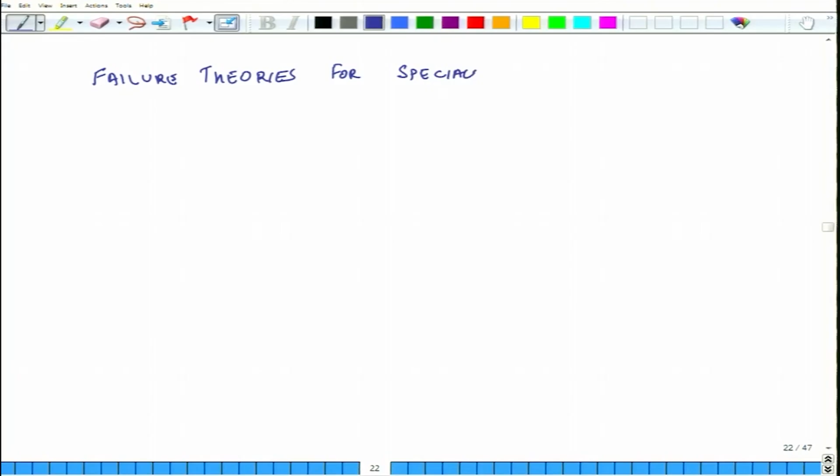So, our theme of discussion is failure theories. Failure theories for specially orthotropic lamina, and since it is very thin, we assume that it is plane stress. That is assumed. Okay.

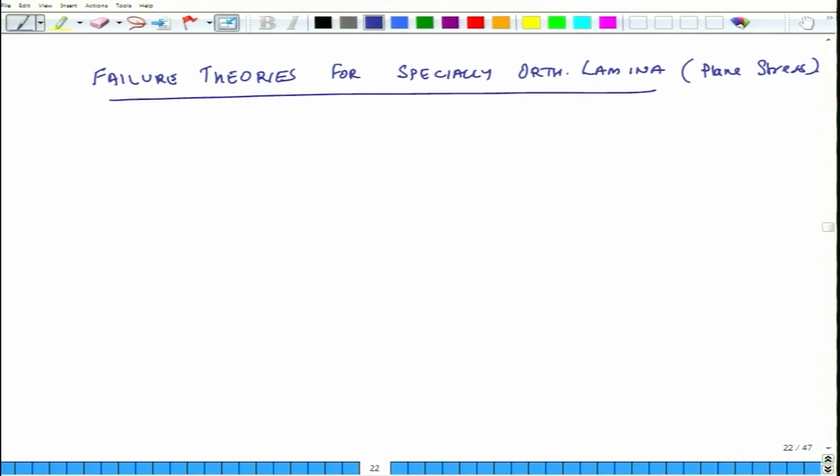So, before we start discussing in detail, we know based on our earlier studies that if we have to predict failure in case of metals which are isotropic materials, then we have several theories of failure. For instance, maximum stress theory, another one is maximum strain theory, another one is maximum strain energy theory, then there is another one known as von Mises theory.

And in several of these theories we use the concept of principal stress. So, what we do is we compute the value of principal stress and we compare that value with the strength of the material, and if the strength of the material is more, then we say the material is not failing. If the strength is less compared to principal stress or principal strain, then we say that the thing is failing.

So, this is what is done in context of isotropic materials, and the reason we are able to do this is because the strength of the material is same in all directions. If you have a piece of metal and you pull it in x direction or y direction or z direction, its strength does not change with respect to the orientation of the force, because it is an isotropic material.

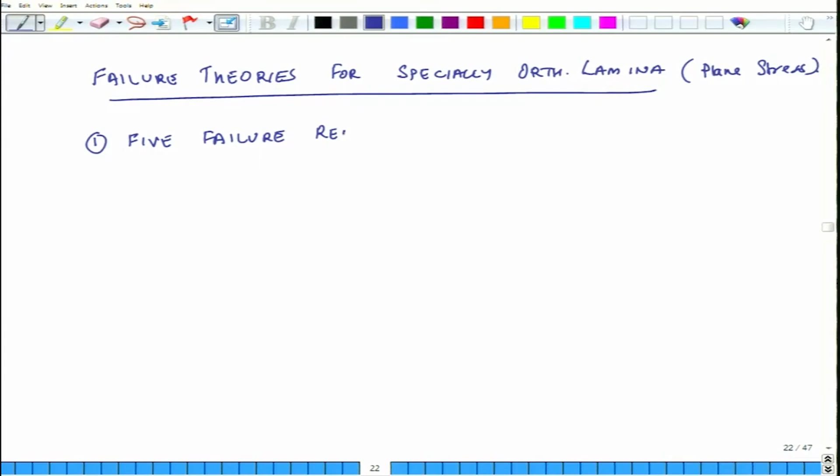So, in that context, first thing we will say is that a specially orthotropic lamina under plane stress has 5 important failure related material properties. So these are 5 fundamental material related properties.

What are these? The first one is sigma Lu, and this is the ultimate tensile strength. So U is ultimate; sigma Lu is tensile strength in L direction. This is the first fundamental.

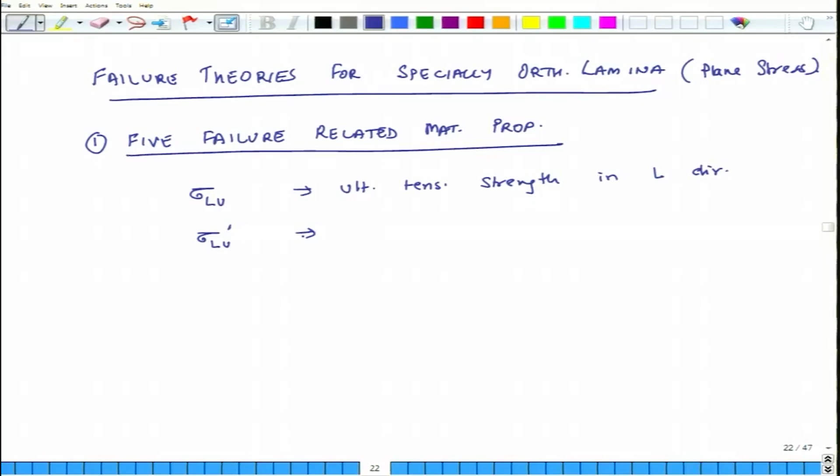The second one is sigma Lu prime. If I have a lamina and, instead of pulling it in tension, I compress it, it may fail also at some load. So this is ultimate compressive strength in L direction. Okay. So these are 2 properties.

Similarly, we have 2 properties for transverse direction. Sigma Tu is ultimate tensile strength in T direction, transverse direction. So what is sigma Tu? Fibers are like this and I am pulling it in tensile direction, but in the transverse direction.

And sigma Tu prime, here the prime indicates the direction is compressive, it is ultimate compressive strength in T direction.

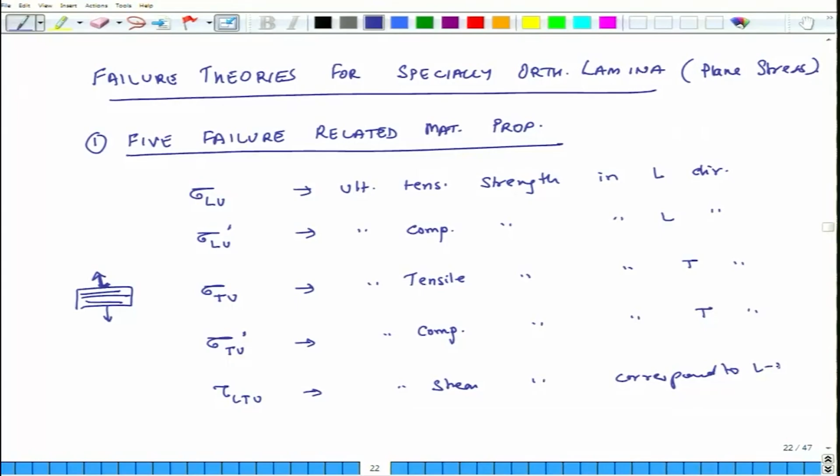And the last one is tau LTu, it is ultimate shear strength corresponding to LT plane. So what that means is the lamina is loaded only under shear and it may fail, and the fibers are like this.

Okay. So these are 5 material related properties associated with failure of a thin lamina, specially orthotropic lamina, which is subjected to a plane stress situation. Now, using these 5 properties, 3 theories will be discussed, which will help us understand when a composite is going to fail. The first one is maximum stress theory.

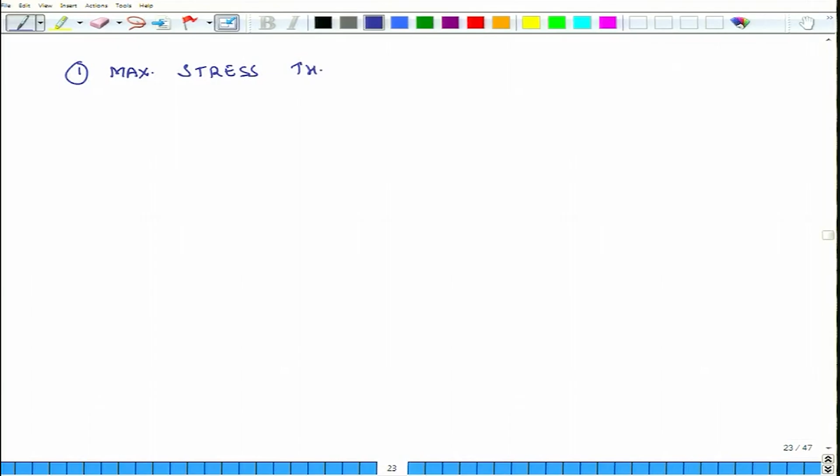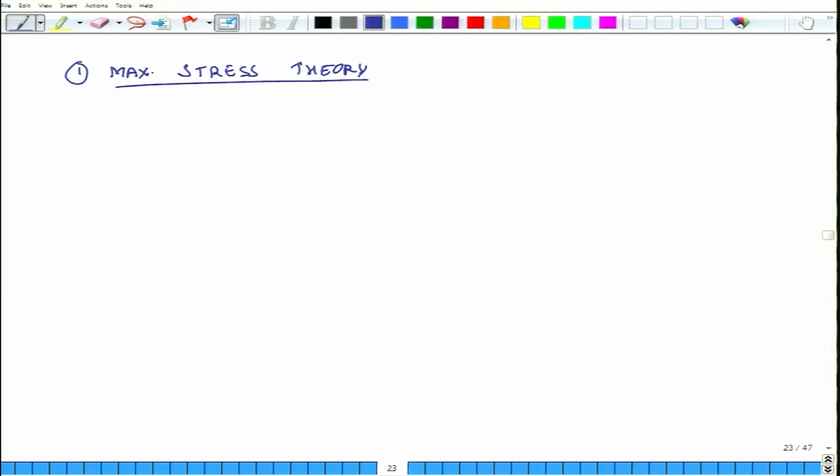Maximum stress theory. So what does this theory say? That a single lamina is not going to fail as long as the stresses in the L and T direction, sigma L, sigma T, and tau LT, are less than their respective strengths. If any one of those stresses exceeds its strength, then the material is going to fail.

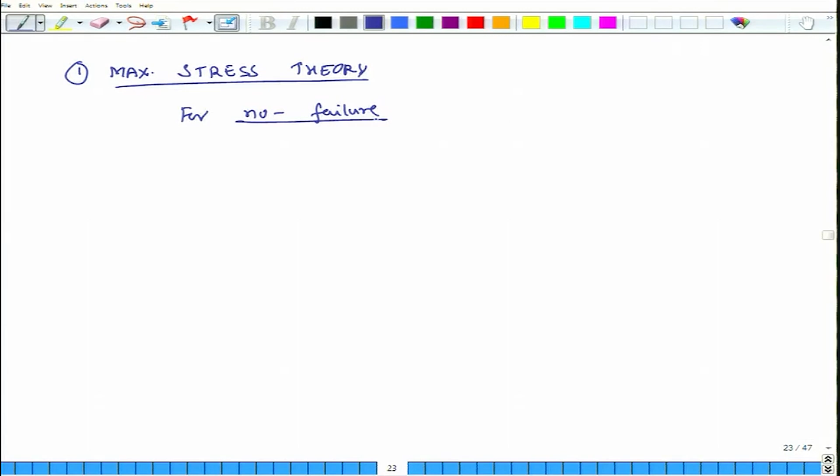So mathematically, what does that mean? That for no failure, the following conditions have to hold true. Sigma L should be less than sigma Lu, sigma T should be less than sigma Tu, and tau LT should be less than tau LTu. Okay. All of them have to hold simultaneously.

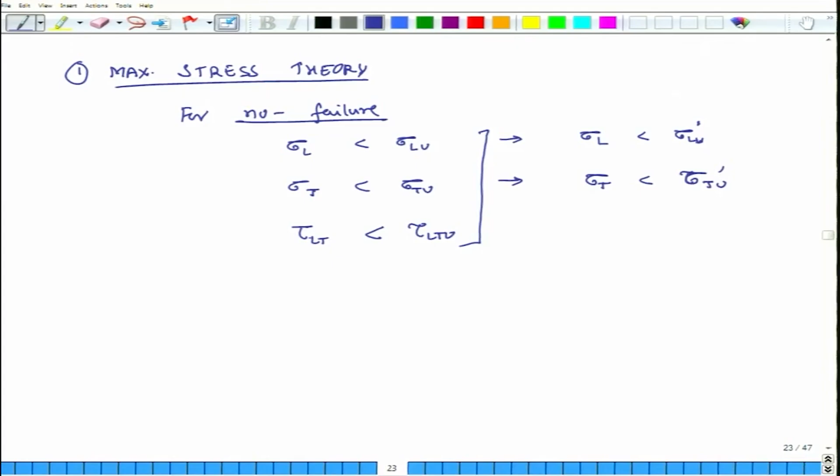Now, there could be a case that sigma L is negative. Then in that case, the condition would be sigma L should be less than sigma Lu prime. And if sigma T is negative, then sigma T should be less than sigma Tu prime. So it depends. If sigma is compressive, then you have to compare it with its compressive strength in the appropriate direction.

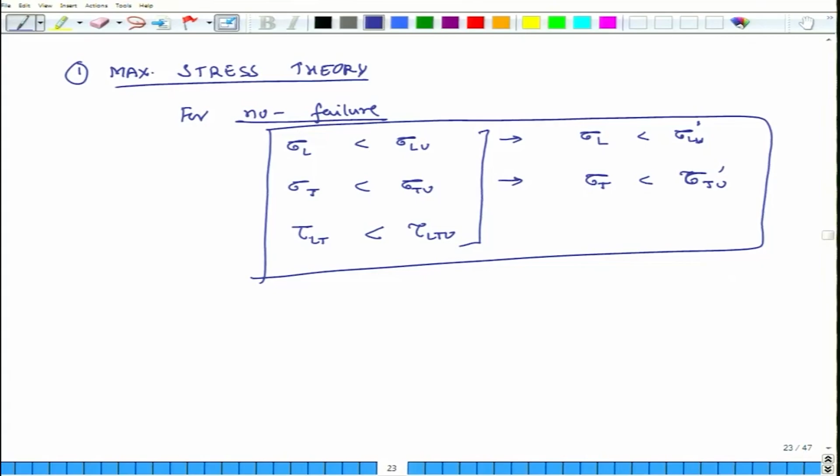Okay. So these 5 conditions are there, and all these 5 conditions must be true; even if one of the conditions gets violated, the material is going to fail. So, this is the first theory for failure of composite materials. Okay. So, let us do an example.

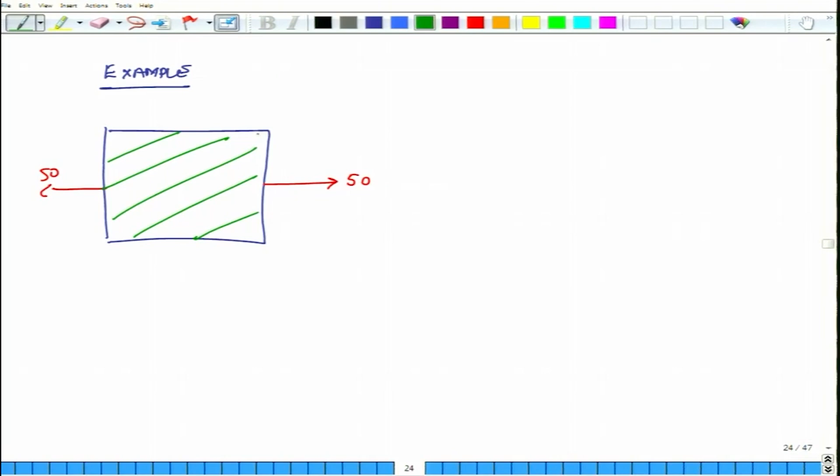So, the example is, we have a lamina and I am applying some stresses on it. So, what are the stresses? 50 MPa in tension. These are my direction of fibers. So, this is my L direction, this is my T direction, this is my X, this is my Y. So, in the Y direction, the stress is negative.

So, it is minus 25, and then I have also a shear stress applied, and the value of shear stress is 50. So, all these are MPa. So, tensile stress in x direction 50 MPa, compressive stress in y direction 25 MPa, shear stress 50 MPa, and the material properties are also given.

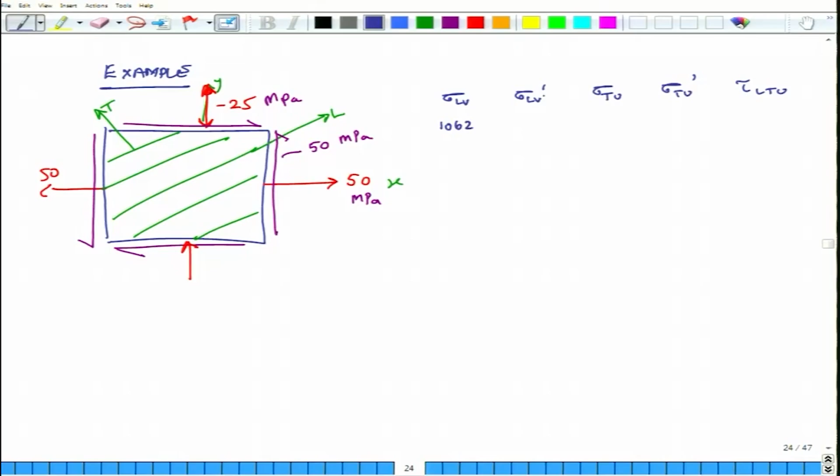So, let us see what the material properties are. Sigma Lu, sigma Lu prime, sigma Tu, sigma Tu prime, and tau LTu. So, this is all given. So, what are their values? This is 1062, this is 31, this is 72, this is 610, and this is 118. Okay. So, these are all in MPa. So, the question is, will the material fail? That is the question.

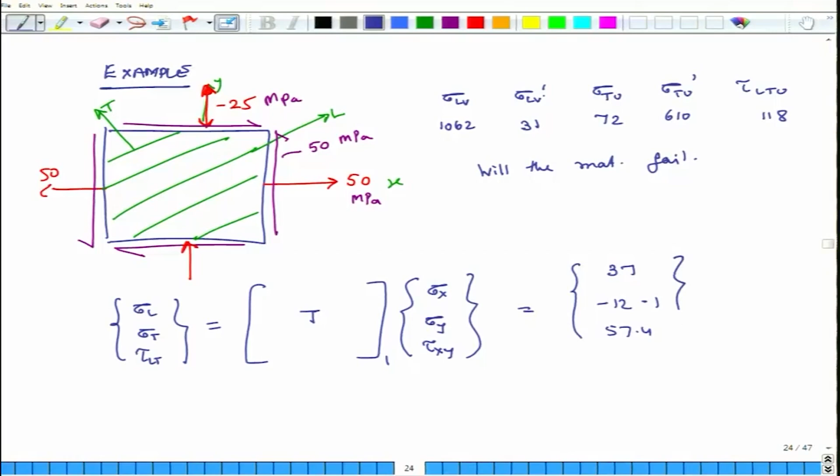So, what do we do? First, we compute sigma L, sigma T, and tau LT. This is nothing but the transformation matrix T1 times sigma x, sigma y, tau xy, and we know how to calculate this transformation matrix. So, we do all these calculations and we find that these values are 37, minus 12, and 57.4. So, sigma L is equal to 37, sigma T is minus 12.1, and the shear stress tau LT is 57.

So, now we compare whether any of these values is exceeding its limit. So, first we see 37 and we compare it with 1062. So, it is not exceeding. So, this is okay. The second number is 12.1, but it is negative. So, we compare minus 12.1 with 610, and again it is not failing.

The third one is 57.4, and we compare it with the shear strength of the material, and again it is not exceeding. So, all the conditions are met. So, no failure. Okay. There will not be any failure. So, this is how the maximum stress theory works.

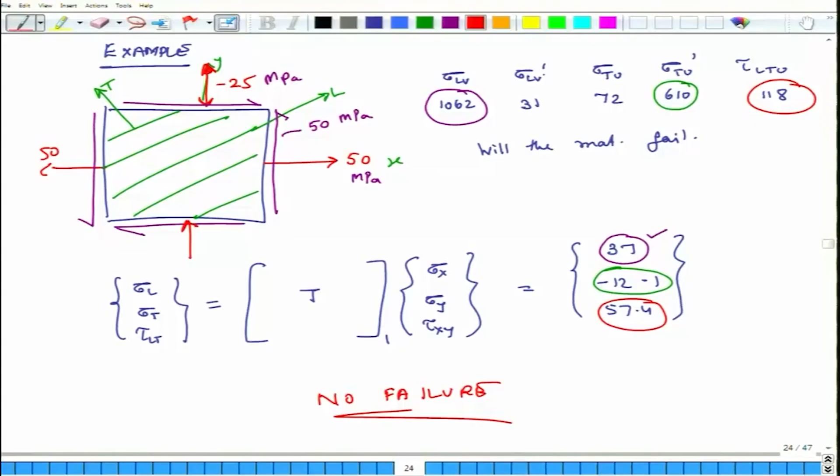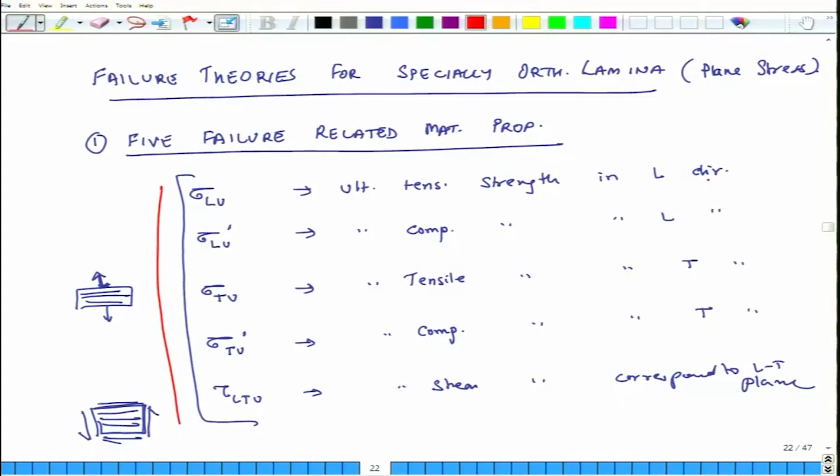Okay. The next theory we are going to look at is maximum strain theory. So, in stress theory we had 5 fundamental properties which are important, and we were saying that the material will fail at a certain stress state. In strain theories, we replace these 5 material properties by similar material properties, but strain related. So, ultimate tensile strain in the L direction will be epsilon Lu, ultimate compressive strain in L direction will be epsilon Lu prime, and so on and so forth.

The maximum strain theory says that the failure will not happen if all of the following hold true.

What are the following conditions? Epsilon L should be less than epsilon Lu, epsilon T should be less than epsilon Tu, and gamma LT should be less than gamma LTu. And suppose instead of tensile strain, I have a compressive strain, then we look at epsilon L should be less than epsilon Lu prime, and epsilon T should be less than epsilon Tu prime. So, these are the 5 conditions. So, as long as these conditions are valid, the material does not fail. If any one of them gets violated, it fails right away.

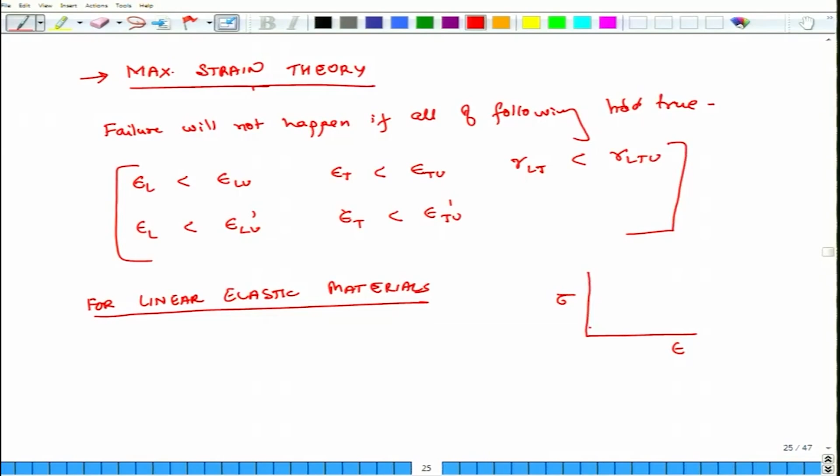Now, we will connect this theory with the maximum stress theory for linear elastic materials. For linear elastic material, what does that mean? It means that if I keep on pulling the material, if I double the stress, the strain also doubles. So, in that case, if I have a stress strain response, here strain and here stress, it is a straight line. It is not a line something like this. This is not the response.

If it is this kind of a line, then I can say that epsilon Lu is equal to sigma Lu by EL, only if the line is straight. If it is not straight, then I cannot have this. Similarly, epsilon Tu is equal to sigma Tu divided by ET, gamma LTu is equal to tau LTu divided by GLT, epsilon Lu prime is equal to sigma Lu prime divided by EL, and epsilon Tu prime is equal to sigma Tu prime divided by ET.

So, for linear elastic materials, the predictions from maximum stress theory and maximum strain theory are very close to each other. There is slight difference because of effects of Poisson ratios, but otherwise they give more or less the same results. But if the material is not linearly elastic, for instance the matrix is plastic and deforms heavily before failing, or the fibers are initially elastic but turn plastic before failing, then we cannot use these types of relations. We can still use the first relations, but the second set of relations cannot be used.

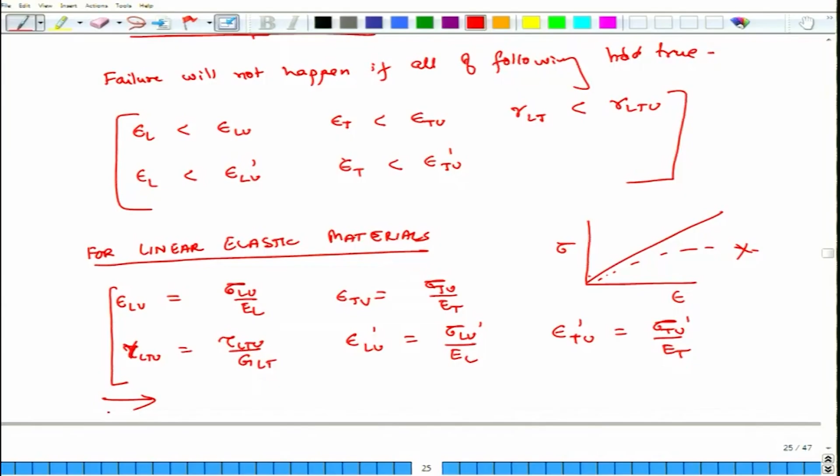So, for linear elastic materials, the predictions from maximum stress theory and maximum strain theory come pretty close to each other. So, this is the second theory, and the final theory which we will discuss today, and the most popular one, is known as maximum work theory, also known as Tsai-Hill theory. It is related to the work done by the system, strain energy and things like that, and we are just directly going to tell you the results.

So, what does the result say? The system is going to fail if the left hand side of this equation exceeds 1. If it does not exceed 1, it will not fail. So, (sigma L divided by sigma Lu) squared minus sigma L divided by sigma Lu times sigma T divided by sigma Lu, and remember here the denominator is still sigma Lu, not Tu, plus (sigma T divided by sigma Tu) whole square plus (tau LT divided by tau LTu) whole square should be less than 1 for no failure.

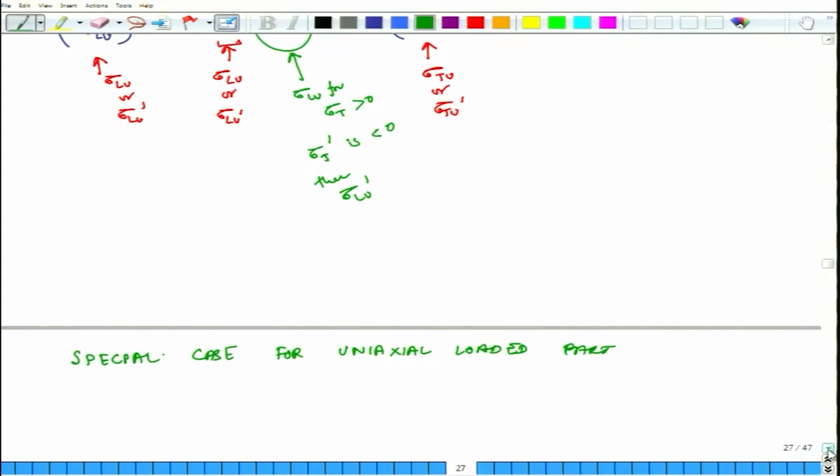What does that mean? That it could be something like this. So, here I am having loading just in the x direction; sigma y, tau xy, suppose they are 0. So, this is theta. Okay. Then if this is the case, I can say for this kind of a situation that

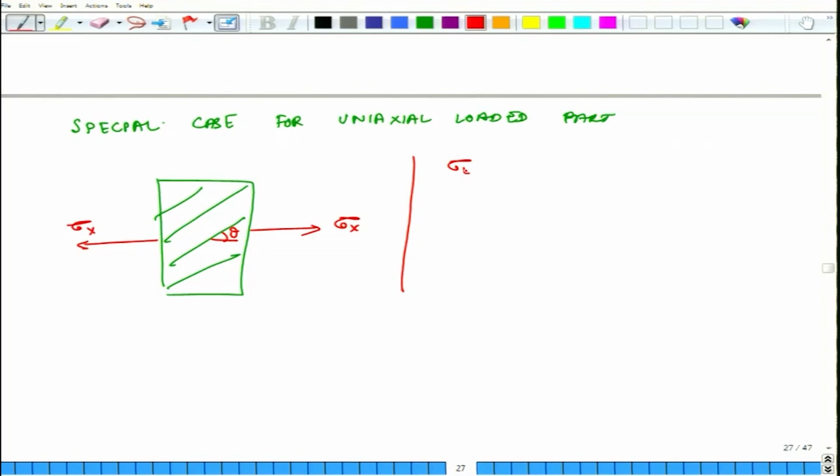sigma L, again using our matrix of T1, sigma L is equal to sigma x cosine square theta, sigma T is sigma x sine square theta, and tau LT is equal to minus sigma x sin theta cosine theta. So, if we are applying only sigma x, then these are the values of sigma L, sigma T and tau LT. Let us say this is equation number 2 and let us call this equation number 1.

Then I can put 2 in 1 and what I get is cosine 4 theta by sigma Lu square minus cosine square theta sin square theta by sigma Lu square plus sin 4 theta divided by sigma Tu square plus sin square theta cosine square theta by tau LTu square is less than equal to 1 over sigma x square. So, this is the equation for a uniaxially loaded specimen.

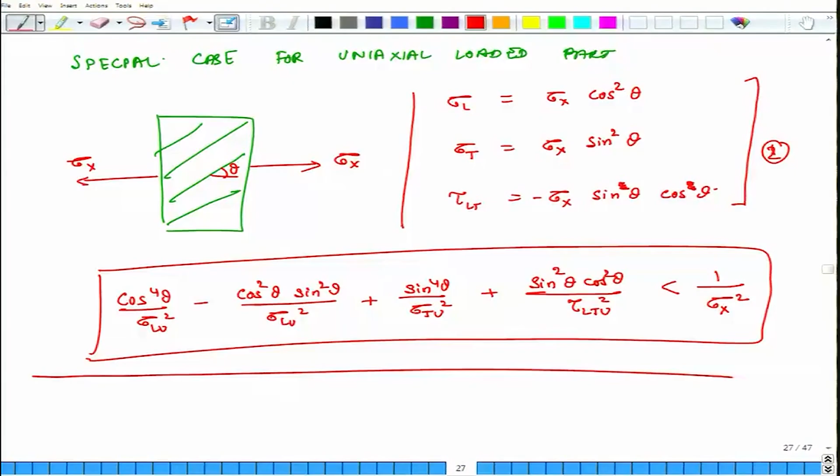Okay. So, sigma y, tau xy are 0, right. So, it is minus of that thing, yes. This is negative of it, but then it gets squared, so it gets corrected. Okay. So, this is the Tsai-Hill criteria for predicting failure. So, we will again check on this example and see whether the Tsai-Hill criteria tells whether this thing is going to fail or not. So, we will again redo this example.

So, sigma x in this case is 50, sigma y in this case is minus 25, tau xy in this case is positive, and it is important to remember the signs of stresses, and that is something we will discuss later also. So, plus 50, and then finally sigma Lu equals 1062, sigma Tu equals 31, tau LTu equals 72, sigma Lu prime equals 610, and sigma Tu prime equals 118.

So, we have already calculated all the values. Sigma L we calculated earlier, and theta we had defined was 60 degrees. So, sigma L we calculated as 37, sigma T as minus 12.1, and tau LT as 57.4. Okay. Now, with this condition, let us apply the Tsai-Hill criteria. So, here we have 37, and this has to be divided by sigma Lu 1062, the whole thing square, minus